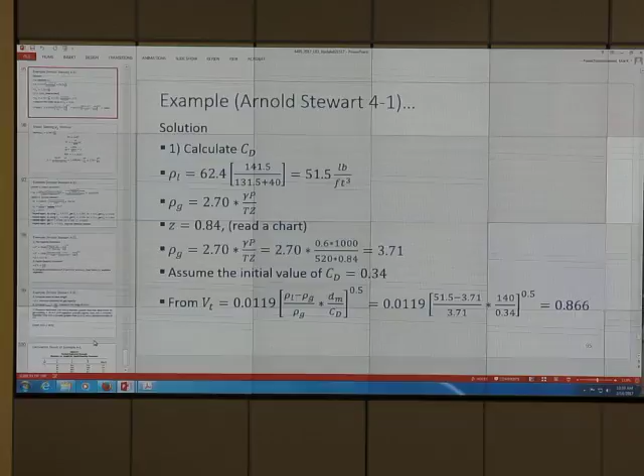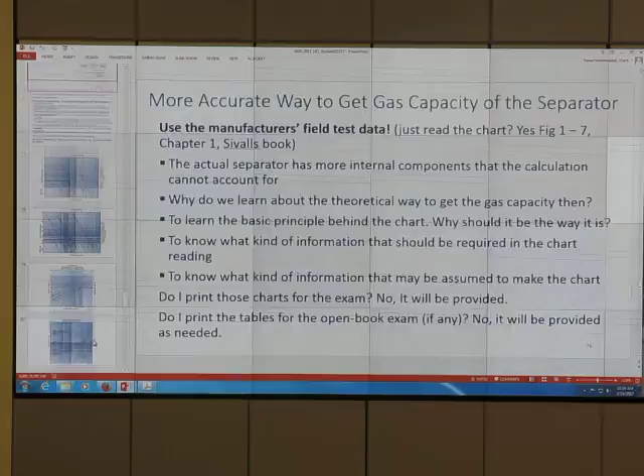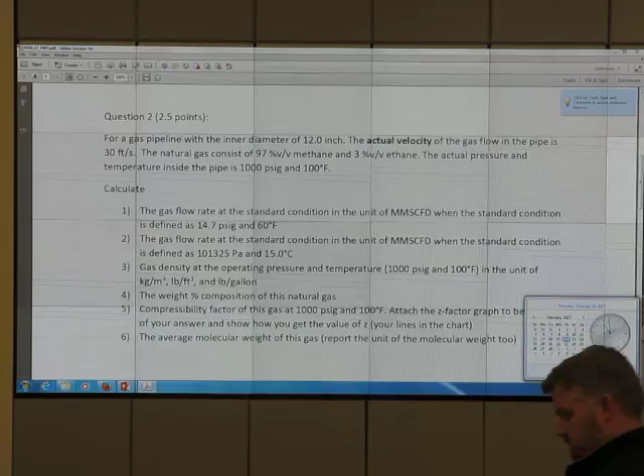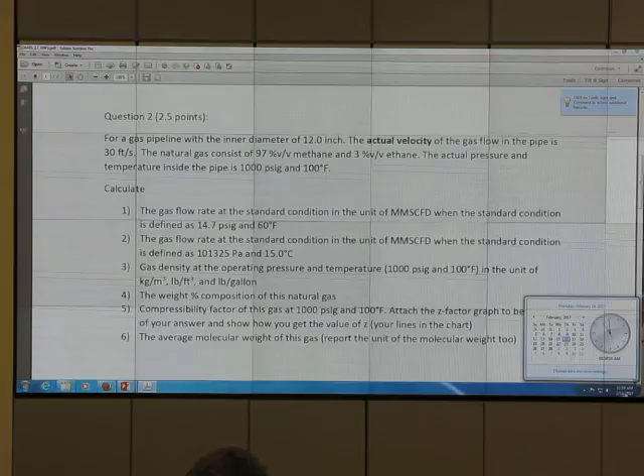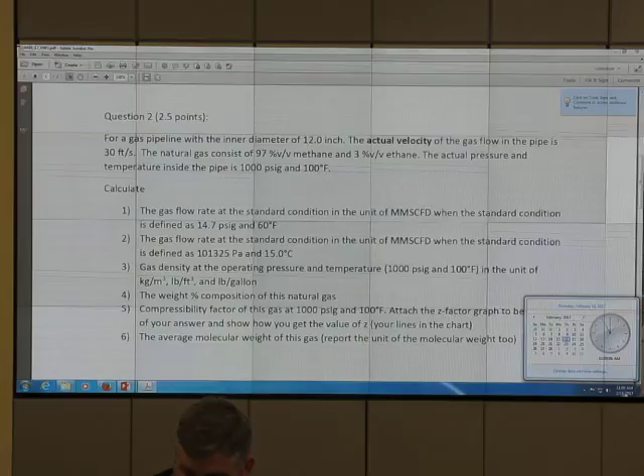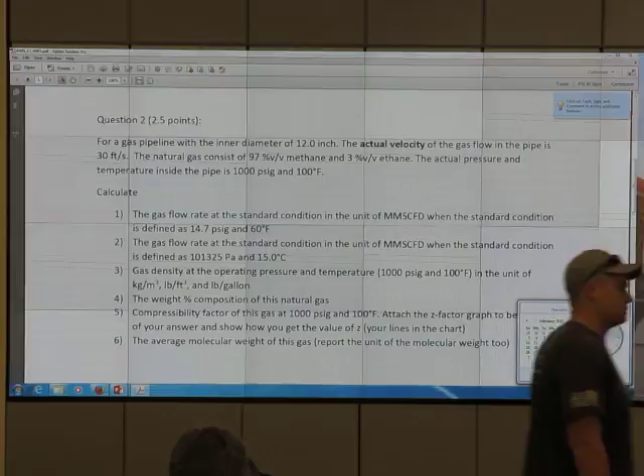First thing, who has not signed the release form for the field trip yet? Field trip release form, how many? One. Who else? Just one. Can you get it from the TA? Okay. Alright, we will have the release form for you.

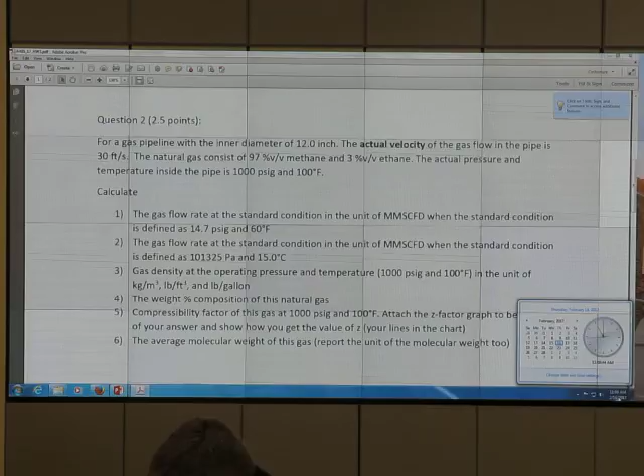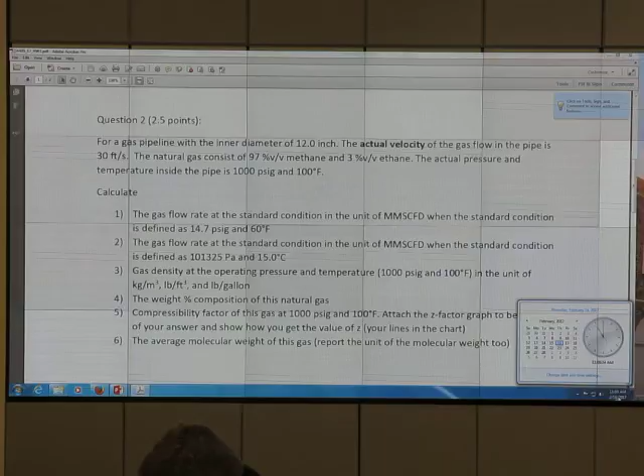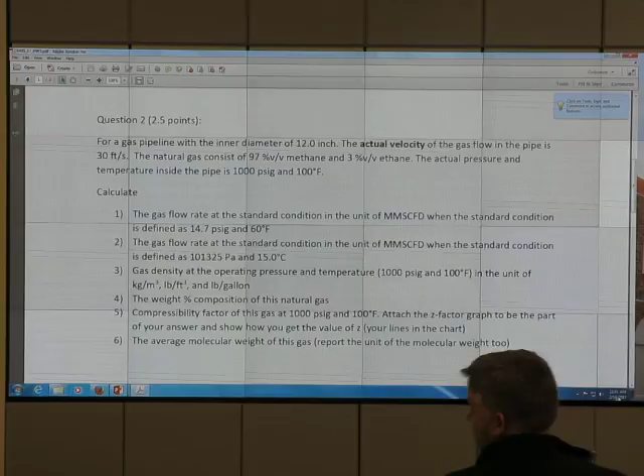We will talk about homework a little bit. It is due tomorrow night. And then 6 hours later we will have a field trip. For the field trip you have to bring your safety glasses. Do they need a hard hat? No hard hat. Okay, no hard hat. And if it is cold, bring your jacket too, okay?

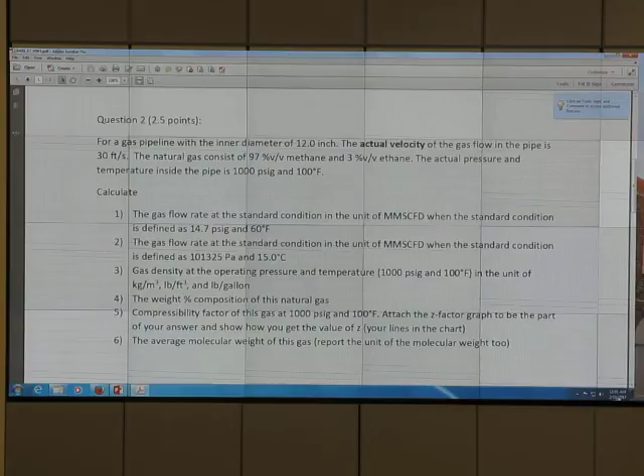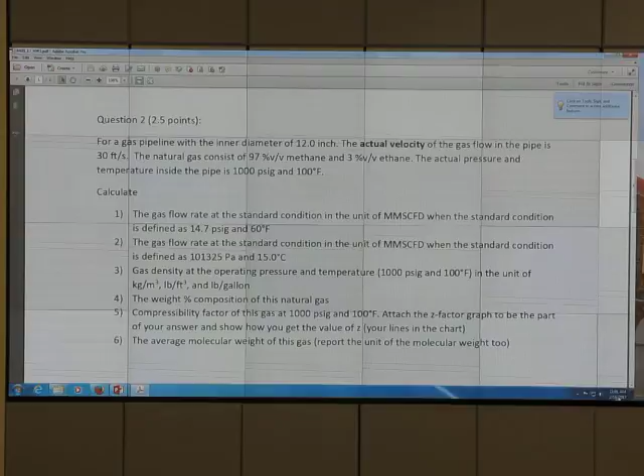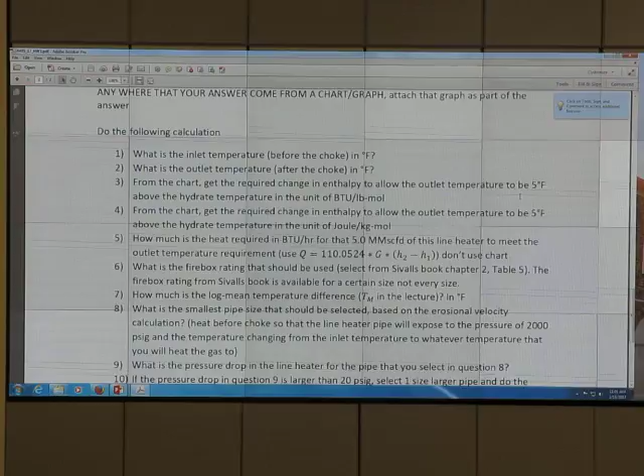We will talk a little bit about homework, and then we will try to finish the gas liquid separation, and then go over liquid separation. You ready? Okay. Some of you asked me a question about this part, question number 2.

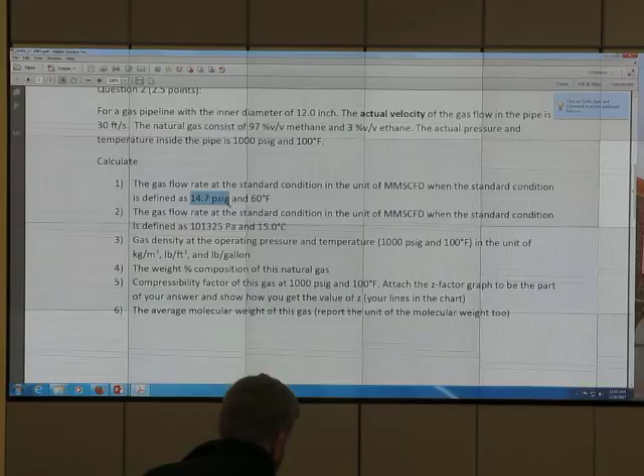Gas flow rate at standard condition, 14.7 psig. Should it be psia? Yes, it should. It is my typo. If you did it with psig, it's fine, because it's my mistake. If you did it with psia, it is also fine, because the standard condition is not 14.7 psig. That's the typo here. So that was meant to be psia.

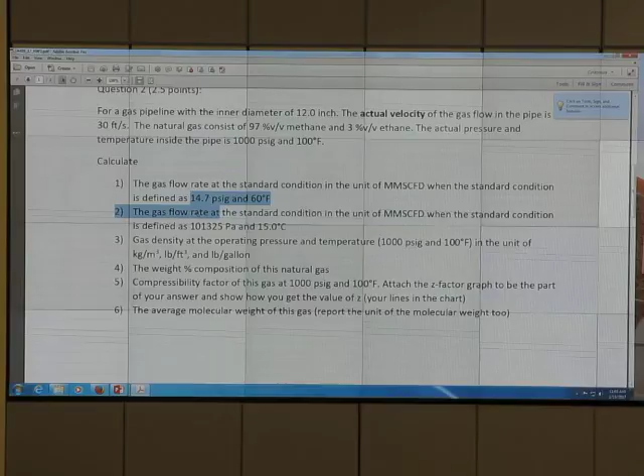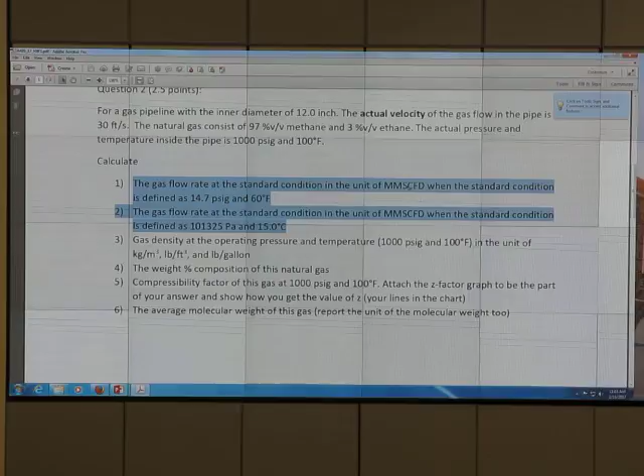Okay, next step. 15 Celsius is 59 Fahrenheit. They are not identical. That one is 60F, this one is actually 59F. And that one is 14.6956 psia, and that one is 14.7, very close. So you should get something very close, maybe 0.1% different. The procedure to convert from one standard condition to another should be correct. If your answer is correct, it should be almost the same. When we report one flow rate at one standard condition and another standard condition, it should be almost the same.

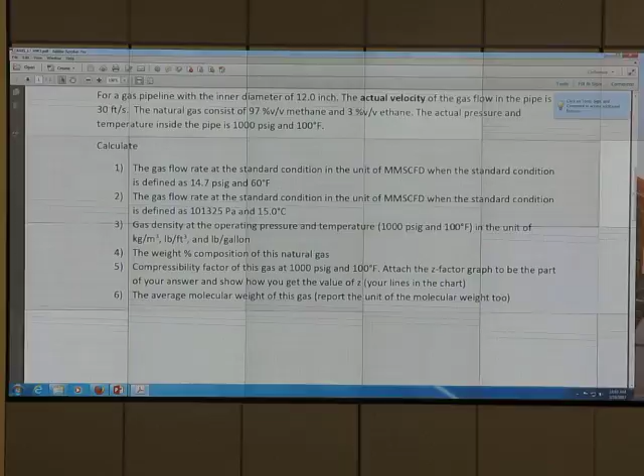More on the homework. This one we asked about the actual velocity. We have the actual velocity of 30 feet per second, and from that you want to get the standard flow rate. Okay, everyone did that without any problem? Many of you came to see me, so let me explain here so I don't have to open the door for you to come again. This one is number 2.

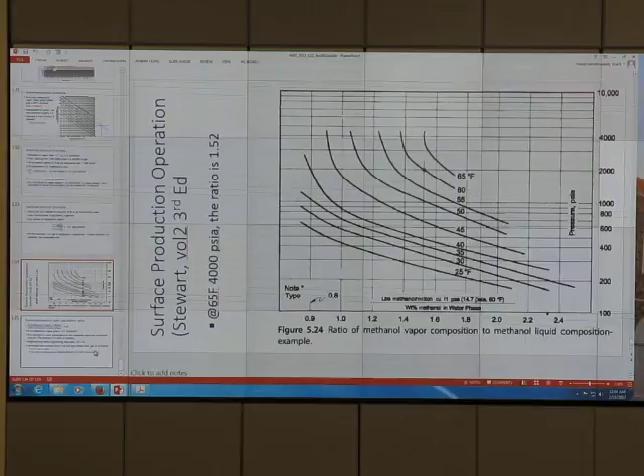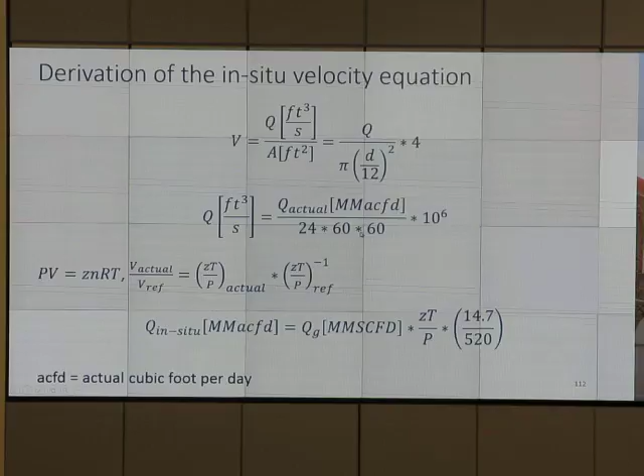You may recall the equation that has V equal to 60 something. Do you? Okay. V equal to 60 multiplied by Q sub G T Z over D squared P, and you see the derivation, right? That Q sub G is the standard gas flow rate. It has S, MMSCFD, that is flow rate in million standard cubic feet per day. That T is the temperature corresponding to the actual temperature in the pipe. The compressibility factor Z is at the actual temperature and pressure, not standard. That P is not standard pressure, it's the actual pressure in the pipe, and that velocity is the actual velocity in the pipe.

So this means that if you have an actual velocity of 30, put 30 in place of V, right? And put the temperature and pressure of the gas inside the pipe. Then get the compressibility factor from the chart. Then you can calculate MMSCFD from this equation. Good? It's easy, right? Does that give you Q actual, not Q standard? Did I give you Q actual? I don't think so. Let's take a look.

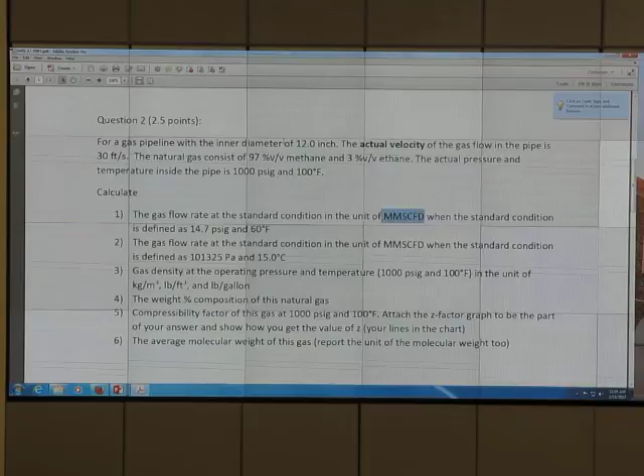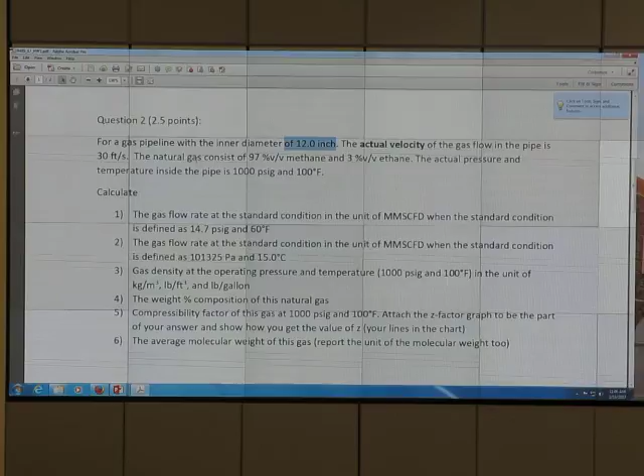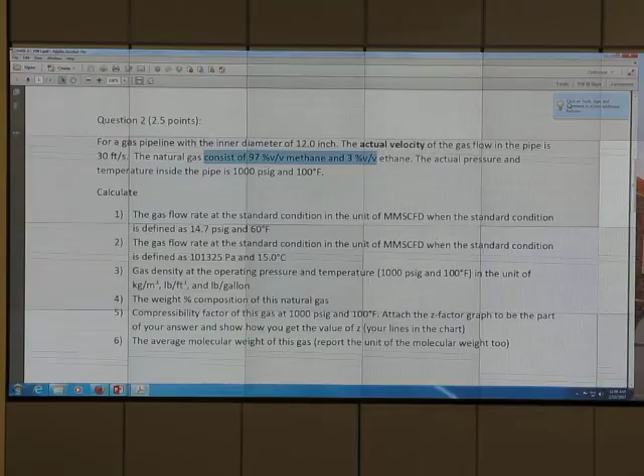I give the pipe diameter D, right? Make sure that you use the right unit. I give you the actual velocity, that is V. I give you the composition of the gas so you can get the gamma. My question is in reference to the Q. Is that Q actual or Q standard in the formula? What do you think? I think it's Q actual, since you have a V. What about MMS? What is that S? Oh, so it's standard? Yeah, I think so.

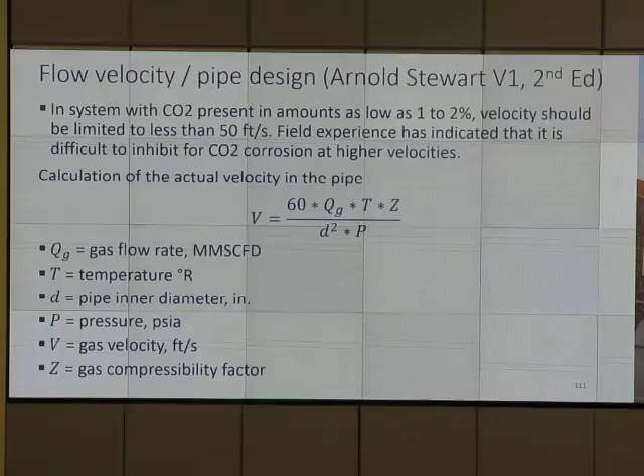Okay, everyone good? I just have to emphasize that it has the S, okay? That was so easy, it was hard. It's hard until I tell you how to do it, right? We will try to cover all of it and do the homework. The deadline, I don't change it.

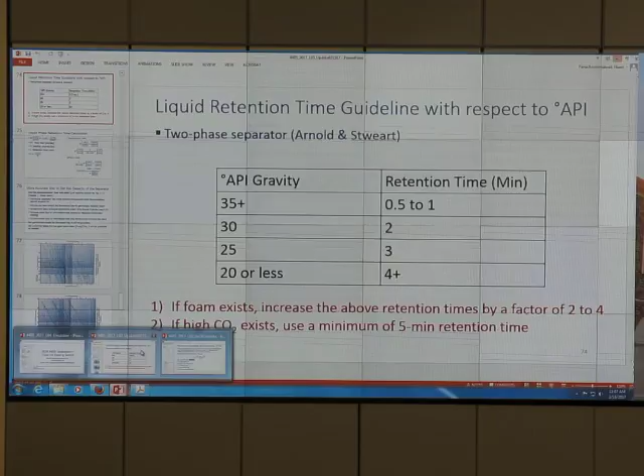Sadly, we don't have homework today because we have a field trip. Next Tuesday, bring the calculator in case we have a quiz, okay? Good. We may not have a quiz next Tuesday. Bring your calculator when you come to class.

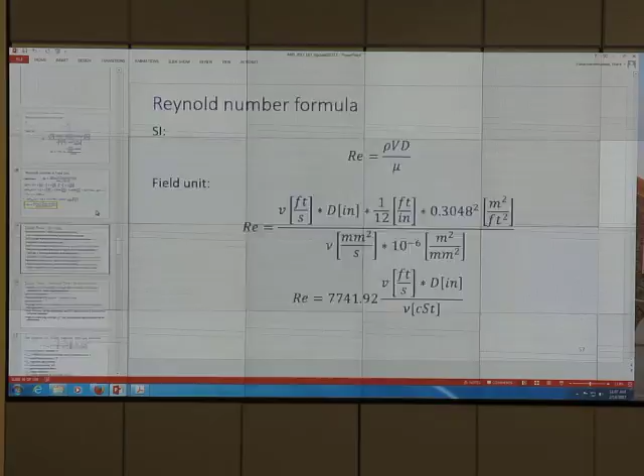So this one is gas liquid separation. Last time we talked about C sub D, right? Drag coefficient. Okay, drag coefficient, and we talked about the terminal velocity, V sub T, and the derivation of it.

Did I? Ernest, when did we stop? I wrote it down. Oh, you wrote it down? Chris?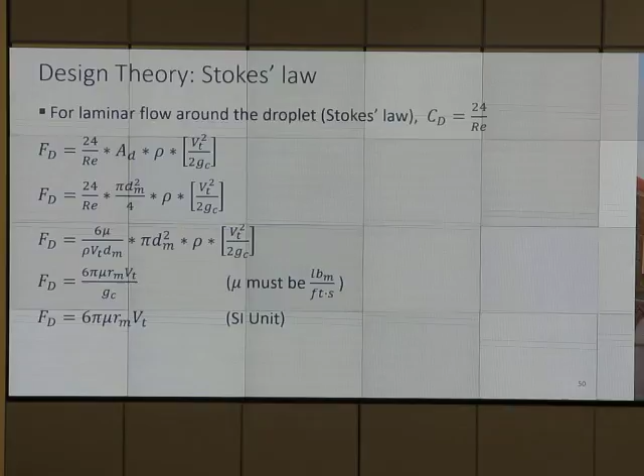Terminal velocity, right? Okay, so do you memorize the equation for the terminal velocity, like Vt equal to 1.787 something? Do you memorize that for the test? No, you don't. I may give you Vt equal to some constant multiplied by delta rho, d square over mu, and I may give you the starting equation.

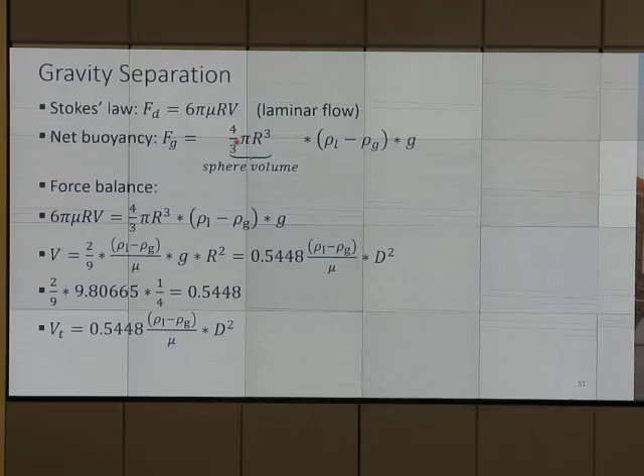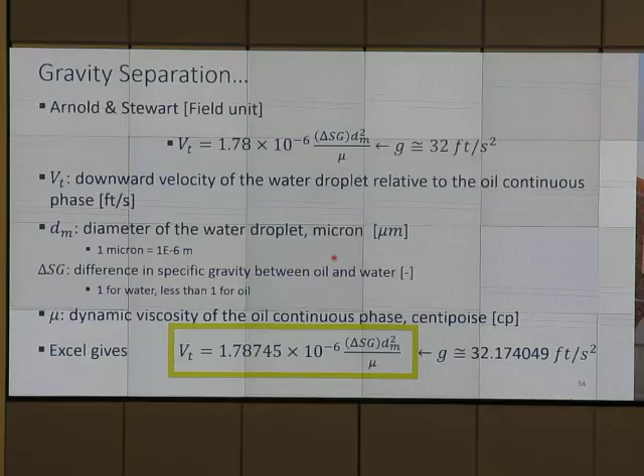Okay. Starting equation, I may give you that one and that one. From those two, you should be able to tell me how to get that. Very easy if it is open book, because it is already in the lecture, you just have to print it. So if it is open book, I don't think we should have that question.

Okay, we talk about the drag coefficient, right? So for this part, you see C sub D equal to 24 over Reynolds number, plus 3 divided by square root of Reynolds number, plus 0.34.

Who's Strong? Whose last name is Strong? Okay. What's your first name? Adam, yes. So that formula, is that for laminar flow or non-laminar flow? Cannot use for laminar flow, right? Okay, so you got it right.

So if it is creeping flow, Reynolds number less than 1 for flow past a sphere, it's just 24 over Reynolds number, right? So we have the derivation. Now we have this chart. And I have already told you that, we didn't go over that yet, did we?

So when we have the formula like this, what you may have to do is do the iteration, okay? Iteration is for when unknown. Actually, we use a chart, okay? This whole thing, you study the difficult way of doing it first, and then later you will see the chart, and it is more reliable.

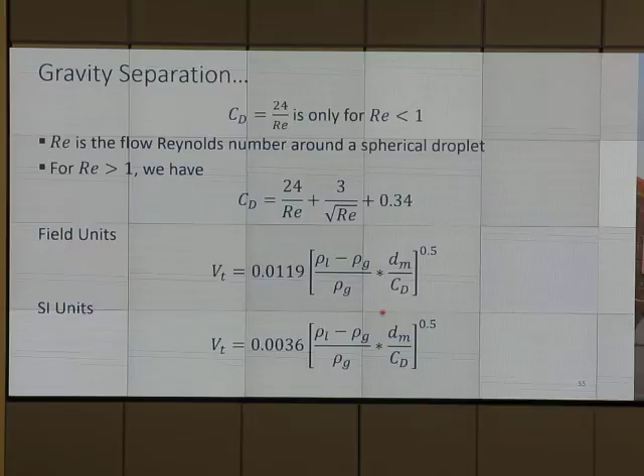But without a chart, what they do is, you see this C sub D? The iteration process, they assume C sub D to be 0.34. Put it over here, the drag coefficient, get velocity. From velocity, calculate Reynolds number. From Reynolds number, put it back to get C sub D. And repeat the process. The example of the iteration will be given at the last slide of this lecture, okay? Go over it later.

Let's do something that is not quite fun. This one, you see Reynolds number equal to 7741 multiplied by something, something, something. See this? Do you know how to get 7741? Yes, of course, if I give you the conversion factor, right? So you should be able to do it. It is expected to be in the exam, very likely, or maybe in the quiz this coming Tuesday.

How about that? So what you have to know is not many. You have to know just, okay, 1 foot is 0.3048 meter, just that. And 12 inch equal to 1 foot. And 1 million micrometer is 1 meter. Put all those numbers in, you get this. Very easy, right? Oh, I don't know if it's easy or not. I will know on Tuesday whether it is easy or not. Yeah. Bring your calculator, okay? It may or may not have a quiz.

Okay? Okay, look at the Reynolds number in the field unit. Okay, Reynolds number in the field unit. You see this one? We have rho V D over mu. Okay, and there's some conversion factor. What you need to know, actually you don't need to know if it is a quiz or if it is an exam. I will tell you that

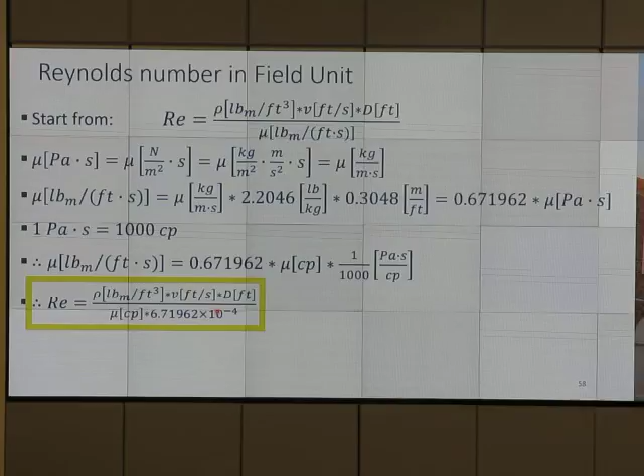It takes about 15 minutes to review it, and I don't know if you will review it or not. So we should have a quiz on this part, right? Maybe just these two is enough for 15 minutes. Okay. Good.

Droplet size theory. Mist extractor gets 10 to 100 micron. By now, I think this number you should memorize because we talk about it too many times. Mist extractor removes 10 to 100 micron. The rest is just for information, okay? Gas scrubber scrubs something that is 500 micron plus. It depends on how they design the gas scrubber for the

compressor. For vent and flare, do we have mist extractor? Maybe. For vent, normally we don't put any mist extractor, because if the mist extractor gets plugged, we cannot vent it, right? So vent, we don't have mist extractor. Flare system, in the textbook, Arnold and Stewart said we typically don't have any mist extractor on the flare system. But for offshore, sometimes they have mist extractor plus safety relief valve.

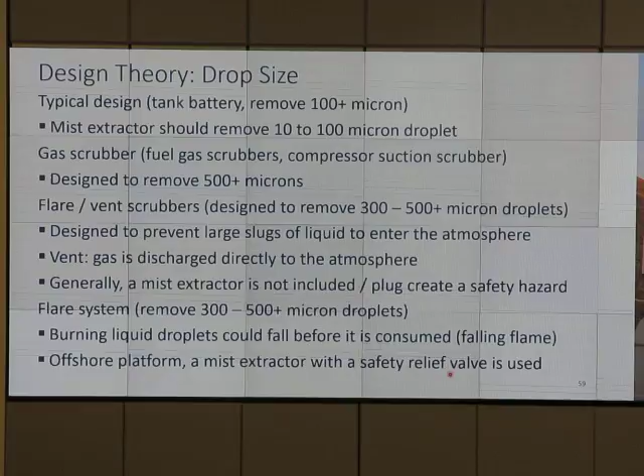Because if there is oil droplet going to the flare, and if that oil droplet is big enough, what happens? When it goes to the flare, it gets burned, right? Guess what? That burning oil will fall down, and they call it burning liquid droplet fall down before it is consumed. So you have like a fireball falling down to the deck. It's not good, right? That happens because the liquid droplet is too big and won't be consumed before it reaches the ground. That could be some hazard. So sometimes they put the mist extractor in and also put the safety relief valve in, in case that mist extractor gets plugged, so everything comes out from the relief valve.

Okay, retention time concept. Retention time is most of the time used for liquid phase. Retention time is the average time of a molecule of that liquid to be retained in the vessel. Basically, when you use a chart that we show later, you just use this retention time. For gas liquid separation, we should use 30 seconds to 3 minutes. Do we use 30 seconds or 3 minutes? It depends upon API gravity, and you will see that table later.

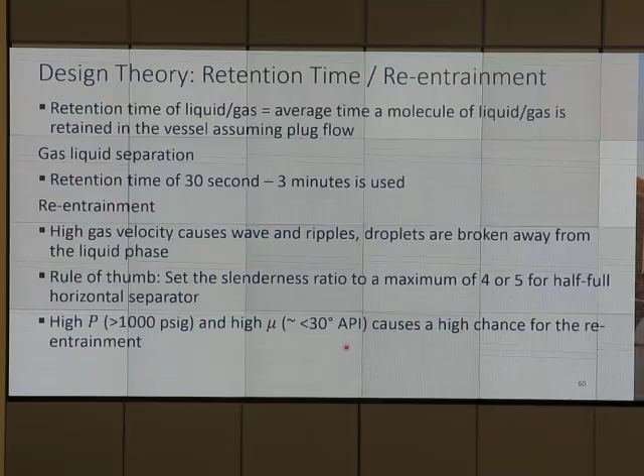Reentrainment. We talked about that a little bit already: if the gas flow rate is too fast, gas can make the droplet coalesce from the mist extractor and be reentrained into the gas stream, right? So that's not good. And the rule of thumb is this: the shape of the separator actually matters. A slenderness ratio of more than 5 for a half full separator is not good. What is slenderness ratio? It's the length divided by the diameter. The formula will be given later, but it's the length divided by diameter. For high pressure and high viscosity, there's more chance for reentrainment. Just for your information, not in the test, but just coming to the lecture is enough.

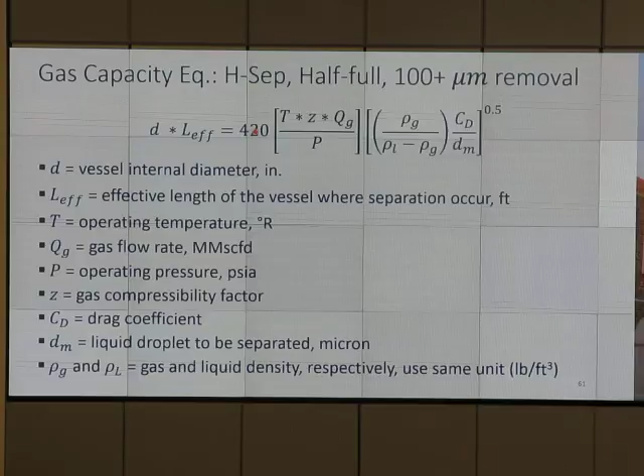Do we actually do that? No, probably not. You use a chart, okay? But I want you to see the equation so that you understand what parameters the information in the chart should depend upon. Let's take a look at how they derive it. Velocity equals flow rate divided by cross-section area. Cross-section area for the half full is half of the circle, right? Half of pi d squared over 4 is the area of the circle, correct? So that is the flow area of the gas phase, the cross-section area of the gas phase in the horizontal separator. So that is to calculate velocity of gas in the horizontal separator.

Okay, look at this one. Q actual cubic foot per second to Q MMSCFD. You can actually use this one for the exam or homework too. If you have the standard condition flow rate, how do we convert that into actual flow rate? Use this. Basically, it's PV equal to nRT.

The first couple of terms is to get from million standard cubic feet to cubic feet per second. That's the first 4 terms. The last 2 are from this part. If you have PV equal to ZnRT, Z at the standard condition is 1, right? You may have the ratio of V1 over V reference equal to ZT over P multiplied by the reciprocal of that term. So it's a relationship between the volume after it expands and the volume before it expands, at the standard condition, V ref over there. Move this over there, so these 2 terms are that. So basically it's a conversion of gas at the standard condition to the actual condition.

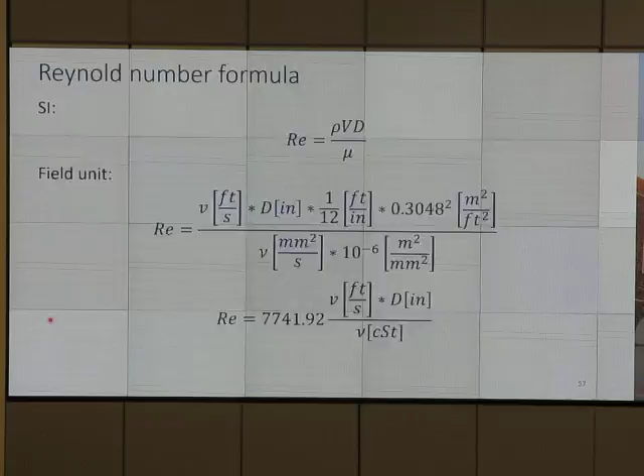So retention time. Jim Lee, what is your retention time? What's the definition of retention time? The time the gas needs to separate from liquid. What is your definition for retention time? Whatever it is in the slide. What about you? Time required for it to separate. Stan, what's your definition for retention time? The amount of time that fluid spends in the separator.

Correct. The amount of time that the fluid will spend in the separator, that is how much time it is retained in the separator, that's retention time, right? The time spent in the separator may not be enough for it to separate, or may be enough for it to separate.

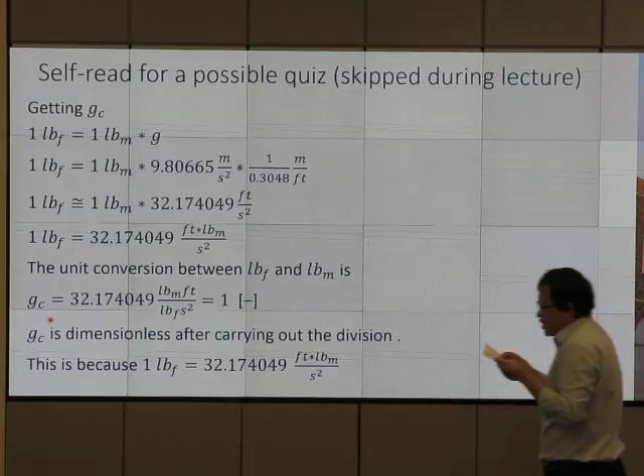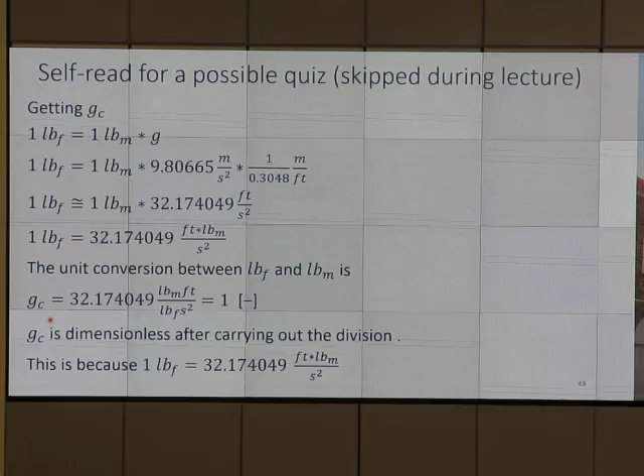Okay, so retention time is not the time that is taken for it to separate. It's the amount of time that gas or liquid spends in the separator, on average. All right. When we have that retention time, settling time, this part is about the velocity. That velocity is the velocity in the horizontal direction, right? So the effective length of the separator divided by the velocity gives us the time spent to travel horizontally, correct? The amount of time that the particle or liquid phase stays inside.

Okay. Look at this one. D over 2 divided by V sub t. V sub t is the terminal velocity. Terminal velocity has the direction of downward, right? And that D over 2 is the length from the top to the half of the bottom. So it is the time required for the droplet to fall down. The first term is the time that the liquid droplet spends to travel horizontally. The second term is the time for the droplet to fall down. Make these two terms equal to each other.

So we give a certain flow rate so that the time required for it to fall down is the time that is spent inside the separator. This way it separates, right? So the time spent inside equals the time required for the droplet to fall down. Then calculate T sub G. Rearrange it. So we put Vt equal to 0.0119. That's the terminal velocity equation that we got already, or the one that you will derive on Tuesday if you have a quiz. Right? That 0.0119. So then you get this equation.

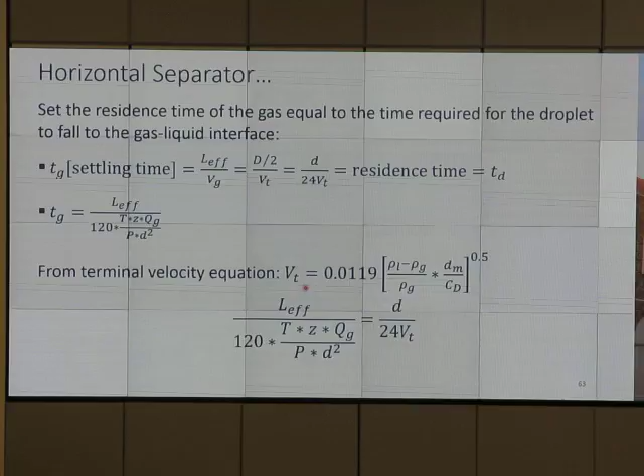Rearrange it again, you get that. This is for a horizontal separator, half full. If it is 1/3 full, you cannot use this equation. It is not the same. This is for half full. Okay.

So we need to know the assumption behind this kind of calculation. The assumption is the droplet reaches the terminal velocity right away. In reality, it's not like that, right? If you have a droplet, it takes a certain amount of time to accelerate until it reaches the terminal velocity, correct? So if I do this, it takes a while until it reaches the constant velocity. So it doesn't reach the terminal velocity right away.

And look at this part. Do we have laminar flow? Maybe not. Maybe we have, we don't know. So we put C sub D over there. If it is not laminar flow, we may have to do iteration. Oh, that will be too difficult compared to using the chart.

Question. Yes. Didn't you make a distinction between creep flow and...? Creep flow is Reynolds number less than 1 for flow past the sphere shape. So can we still categorize it into laminar and turbulent flow? Creep flow is laminar flow. Yes, we can say laminar and turbulent. Creep flow is certainly laminar flow.

Okay, this. Question. Yes. How do you measure your QG? If we look at this term, actual velocity is the actual volumetric flow rate divided by A sub G, right? But we don't know the actual volumetric flow rate, so we find the way to convert from Q sub G, which is the volumetric flow rate at the standard condition, to the actual volumetric flow rate. Yeah, but how do you get QG? QG has to be given.

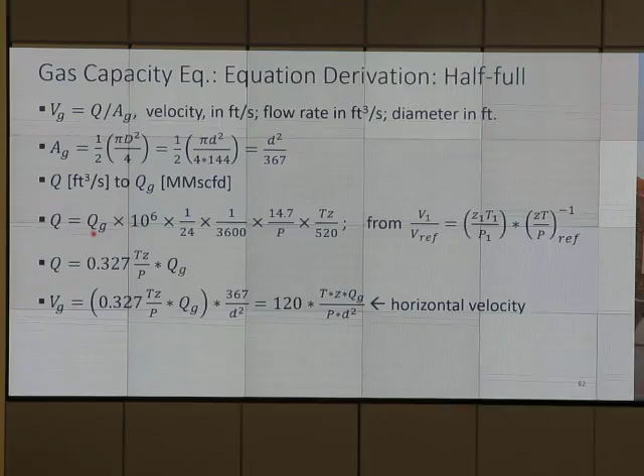So let's say we do the production and we know from reservoir calculation or something, we estimate, okay, this well will give me 1 million standard cubic feet, another well gives 1 million. I have 10 wells, I should have 10 million standard cubic feet for this vessel. So QG is the given number based on the estimation of how much should come in. We may multiply by 1.2, 1.5 or something and size the separator based on that. Make sense to you? So if we have more volume coming in, we use a bigger separator. Make sense? That is indicated by this formula.

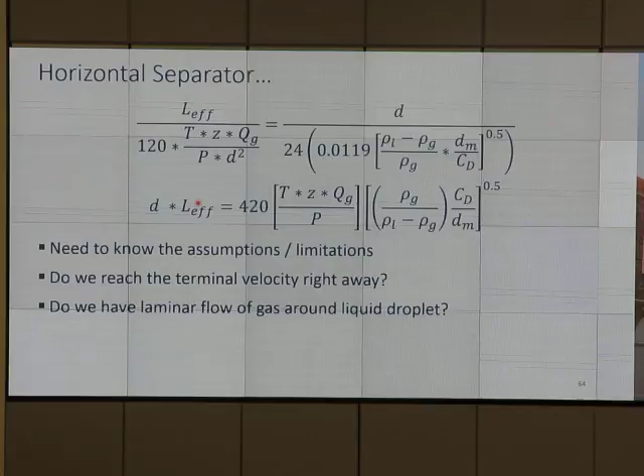So more volume coming in, the diameter or the multiplication between diameter and length has to be more. Okay? Effective length is the actual length where separation happens, which should not include the length occupied by the oil bucket, water bucket or something. How do we know the actual effective length? We don't know, we can estimate it. But the best way to do it is to use the chart provided by the manufacturer. And this looks very nice. You haven't seen it yet.

Okay. Liquid capacity part. For the liquid capacity, we size it based on the desired retention time, T sub R. How much retention time do we think we should have? Put the number in, we get D squared multiplied by L effective. The derivation is the same idea. Same idea means time equals volume divided by Q. So that time is the amount of time that liquid will spend inside the separator, right? The time that liquid will stay in the separator is volume divided by flow rate.

And for the flow rate, the units have to be consistent. The rest is just the unit conversion to allow you to put in barrels per day instead of cubic feet per second. This is not on the quiz on Tuesday, if we have the quiz on Tuesday. Okay, so then the time spent in the separator equals 1.42 multiplied by something over here, right? That T R, we should set equal to the retention time. Then we have this formula, just that. So time equals volume divided by flow rate, and that amount of time is the time that we specify ourselves. We call it retention time. We hope that the time spent inside will match the recommended retention time. Then we can know how much liquid capacity this separator can hold.

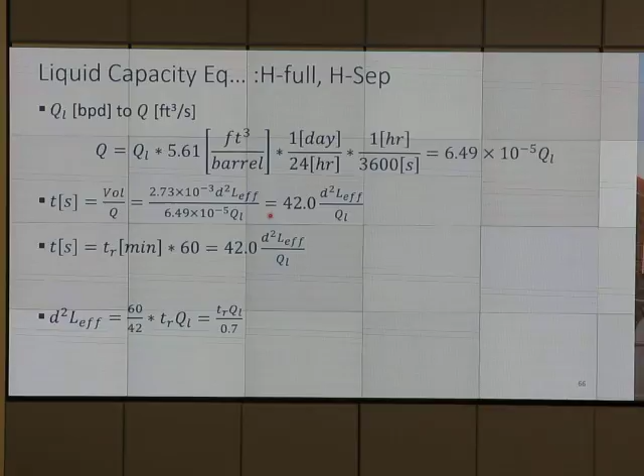Okay. The one that you have seen is for the horizontal separator. So that formula for TQ over 0.7, that's horizontal half full. That 420, that's horizontal half full. Okay. They also make the equation for vertical. What I want you to know is not the final form, but try to see how they derive it. What kind of first equation do they use? So they use the same thing, okay? Gas velocity equals flow rate divided by area. But look at this one carefully. The area for the vertical separator is pi d squared over 4. For the horizontal one it is pi d squared over 4 multiplied by 0.5.

Because another half is occupied by liquid, okay? But for the vertical separator, the whole cross-section area is the flow area. Make sense to you? So we multiply by 0.5 because in the horizontal one the other half is occupied by liquid. But for the vertical one, it's not. Everything is for gas. So that one is the conversion factor to change from standard cubic foot to actual cubic foot. Yes. And then put everything inside.

Oh, look at this one. V sub g equals 60 multiplied by Tz Qg over Pd squared. Isn't that very familiar? The one that you use in the homework, right? Convert the standard cubic foot to actual velocity. Okay? And you get the terminal velocity.

This time you match the retention time and the time that we give for it to flow. Okay? The retention time will be the length, which is the vertical length, right? That's the length divided by velocity. That velocity will come from 60 Tz Qg over Pd squared. That's the terminal velocity. So length divided by velocity gives us the amount of time that the droplet will spend inside. Okay?

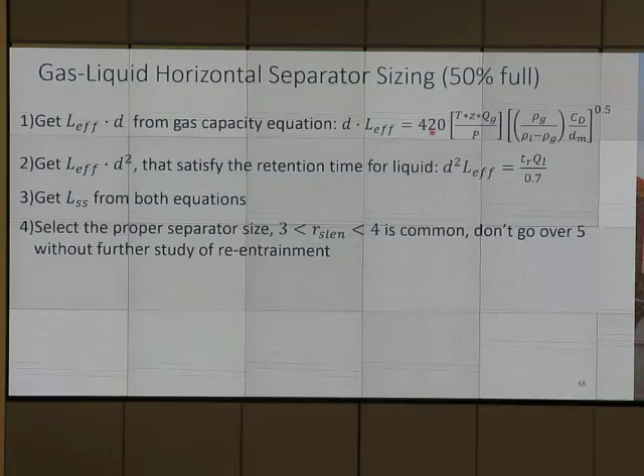So for the horizontal one, we get 420. Okay, dL equal to 420. And this one is not L, it's D squared. That's the difference. This time you get D squared. So this means if you know the right hand side, you can calculate the diameter of the separator right away.

Oh, very great. How do we get CD? Do we iterate it? Probably yes, because it is not going to be creeping flow. You may have to do some kind of iteration. So Reynolds number is the Reynolds number of the flow. So rho Vd over mu, rho will be the rho of the flow. The viscosity will be the viscosity of the flow. This is for clarification, since it may have confused you last time.

Reynolds number is the dimensionless number for the flow. And we have flow around the sphere, right? So rho and mu have to be those of the flow, the fluid, not the solid one. We treat the droplet as a solid particle in the hydrodynamic calculation.

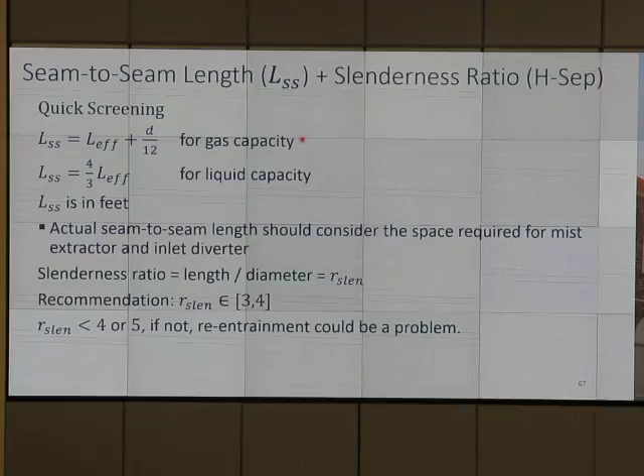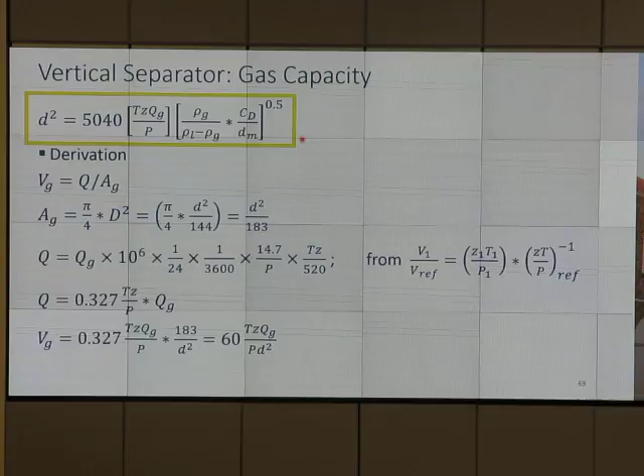This time, instead of 0.7, we get 0.12. Look at this. Just change 0.7 to 0.12, and the left side is d square h. Earlier we got d square L. Look very similar, right? D square h and d square L. So that is the liquid capacity for the vertical separator. Okay, liquid capacity.

So this means H is the height of the liquid volume. This equation tells me that the separator will handle less flow rate if we have almost liquid full, right? We don't have enough time for gas to separate. If we have more height, it can handle more liquid. Of course, if we have more height, it should handle somewhat less gas, isn't it? We kind of have less length. Oh, probably not. It doesn't have a length dimension over here.

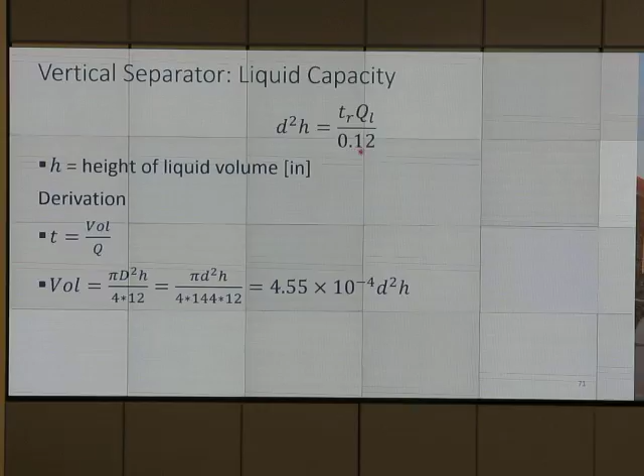Look at this one. The amount that the separator can handle for liquid depends upon the liquid height in the separator, or the set point. If we have it taller or lower, it impacts the amount that the separator can handle. But keep in mind that when we actually buy the separator, the set point is already set, and they already set the dump valve or something. So they just give you the chart to use, and everything in this equation is already included in that chart.

You want to see the chart yet? You just go up, go left, and done. Just that. But let's take a look at some more complicated things first, before you use the chart. The idea of getting that is the same, but the number instead of 0.7 changed to 0.12 because this time QL is in BPD, barrels per day.

Marshall, how many people do we get? How many students do we get in this room? Can you check if it matches the number in the sign-up sheet?

Alright, so that's the conversion factor. We try to change from BPD to Q, and that Q is in cubic feet. Because of different units, we have a little bit different formula.

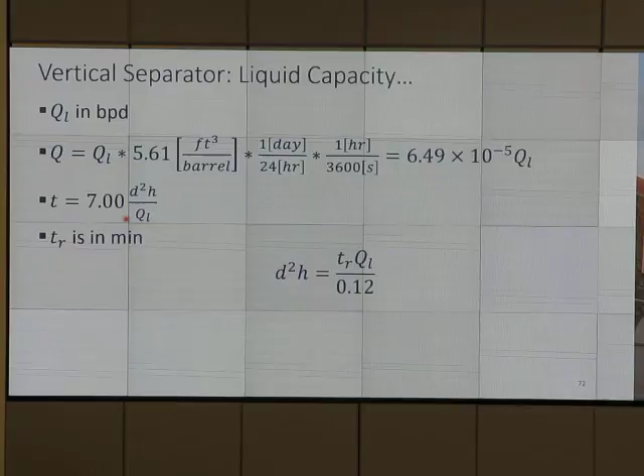When you actually size the separator, you don't check any of this. Believe me, you don't need to check any of this. There's a recommendation for the relationship between the height and the seam to seam length, and the manufacturer already built it according to this recommendation. Make sense? They have to build it right, so they should know this. So the relationship between the height and the length of the separator is set at a certain recommendation. The liquid level will be a certain length below the inlet, so this relationship is already fulfilled, certified by the manufacturer.

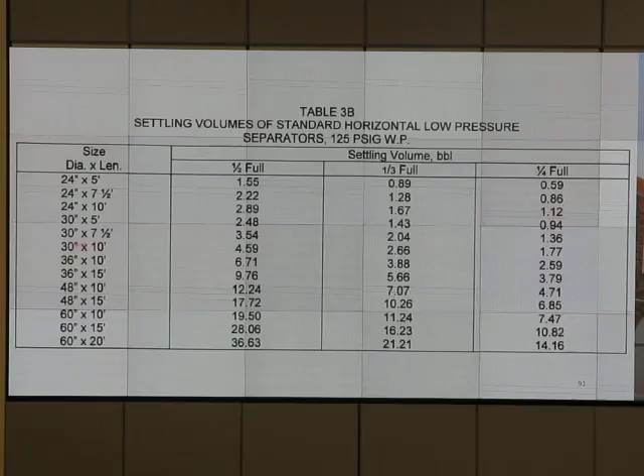And you can calculate the slenderness ratio already. When you buy the separator, it's not likely that they will ask what you want the liquid level to be set at. It's already set, consistent with this kind of detailed calculation. So it is nice for you to be aware that there's a certain relationship: the liquid height has to be related to the total length.

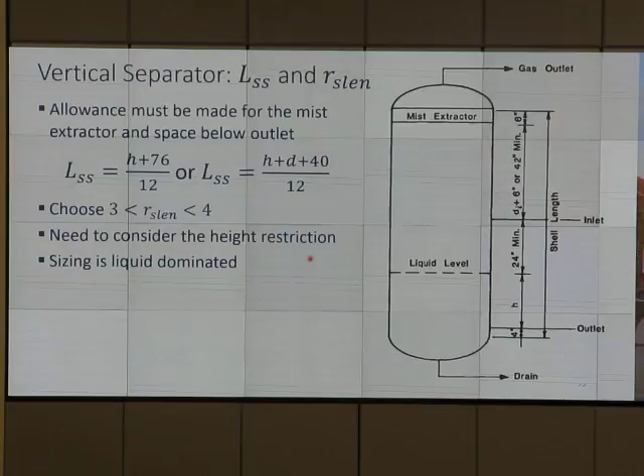Okay, how much is the retention time? This one you need to know. It is important when you actually size it. If you don't know anything, for gas and liquid with thin oil, let's use 1 minute. Is that enough? Yes, for API gravity of 35 plus. If the oil is somewhat denser and more viscous, API gravity of 30, let's use 2. 25, use 3. 20 or less, use 4. If you have foam, multiply by 2 to 4.

If you have carbon dioxide, use a minimum of 5 minutes retention time. You may recall, if you have carbon dioxide, most of the time we will certainly have foam, right? So the retention time, the time that liquid should stay inside the separator, should go up, so it has enough time for the separation.

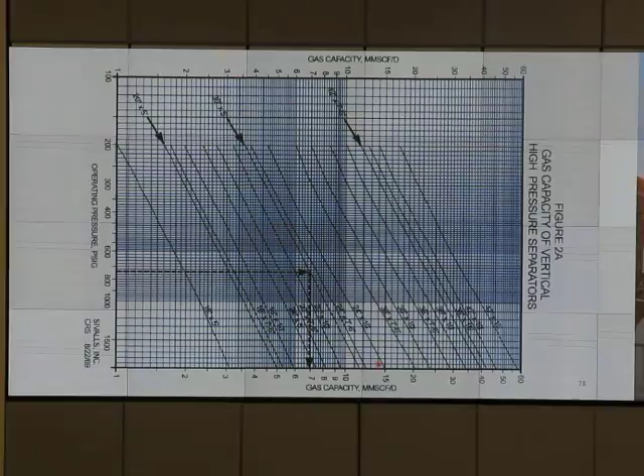Everything here comes from the Arnold Stewart book, the yellow-orange book, and the graph thing. This is from Sivalls' textbook. But is this in a different slide set than what we have? It's a new update, a little bit updated. Added more. You don't have to reprint the whole thing. You just print more stuff that is added in the back. Sorry about that.

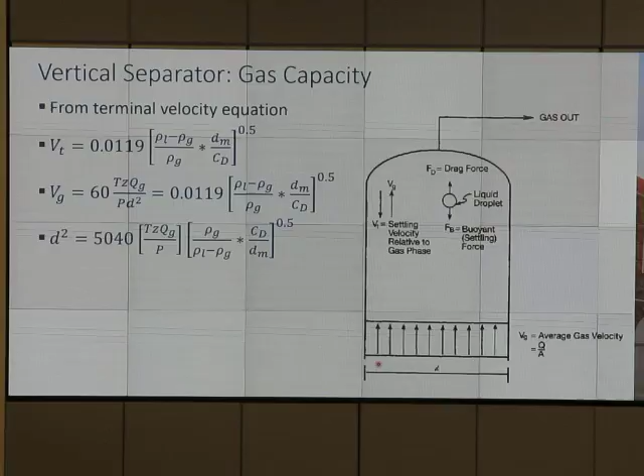You have to do W equal to a conversion factor multiplied by volume. This V is not velocity, it's volume. Sorry for the confusion, but I put in the parentheses that it is BBL, barrel, per minute. How do we use it? When we have flow rate, barrel per day, we put it on the left side, right? Typically we don't know W. We know how many barrels of settling volume we have in the separator.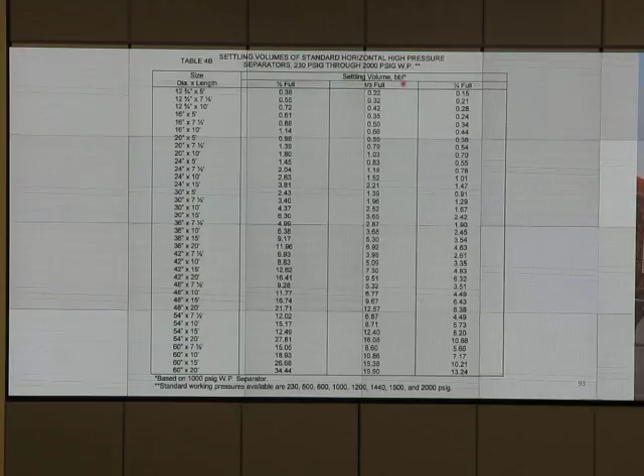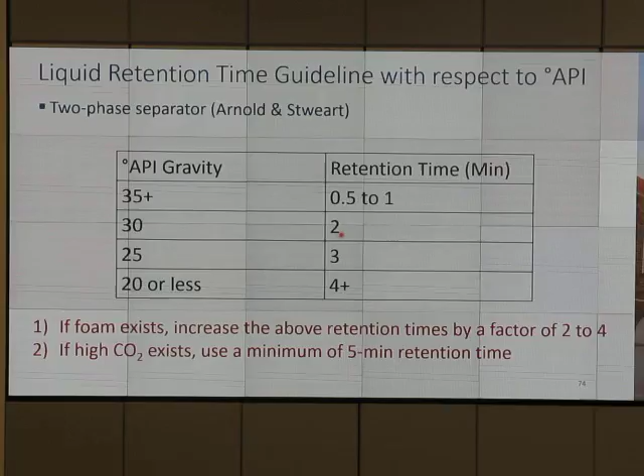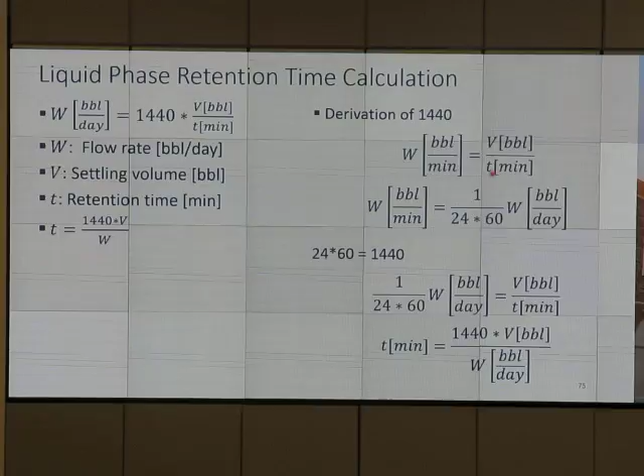Go back to the retention time. API gravity of 30, we use 2 minutes. Go back to the formula. Put that conversion factor there, put the retention time there, multiply by that, so that W will be the barrels per day that the separator can handle. Good? Okay. So how do we get 1,440? Look at this. Volumetric flow rate in the unit of barrel per minute equals volume in barrels divided by time in minutes. Make sense?